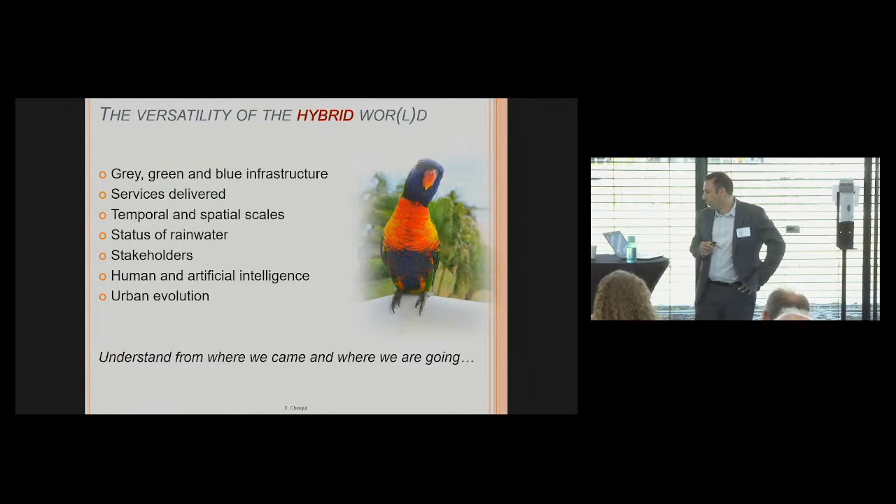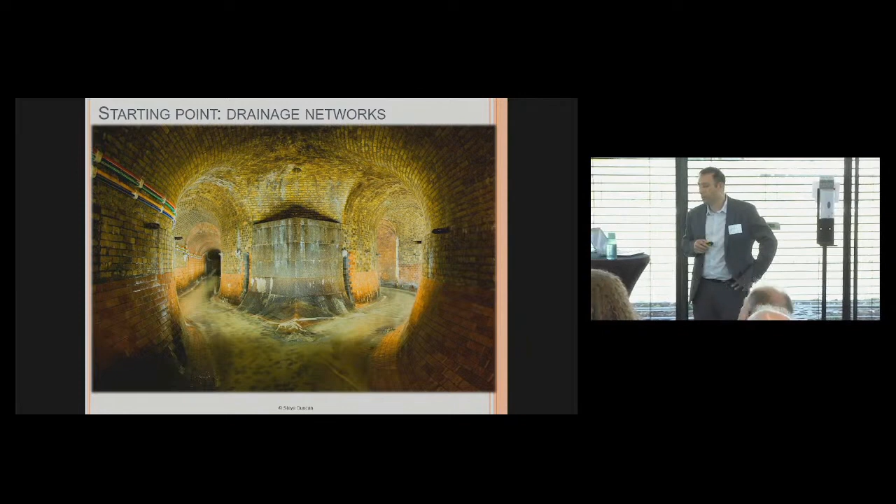So we need a starting point. This will be the starting point, because I like this picture very much. This picture shows a drainage network in London. Really nice picture. So let's start with the drainage network, and let's start at the end of the 19th century, so 100 years ago.

Mainly because of sanitation and centralism, the fact that we all want to bring everything to one place, and we are very proud of that in France. If you go by highway, train, whatever, it's always going to Paris. If you want to go from, let's say, Lyon to Bordeaux, you have to go through Paris. That's centralism. And there was also scientism, saying that science can solve everything. We can build everything and solve everything.

And at this time, we were also very rich. If we had to build the drainage network today, it would be impossible. We don't have the money to do that. So we came up with the network, for drinking water, for the drainage network, and for sewer.

I would like to show you a picture. This picture comes from a book written in 1900, in which a writer wrote about the world in 2000, 100 years later. In 1900, Albert Robida, a not very well-known French writer, wrote this book. And in this book, there is this drawing of what the city could be in 2000.

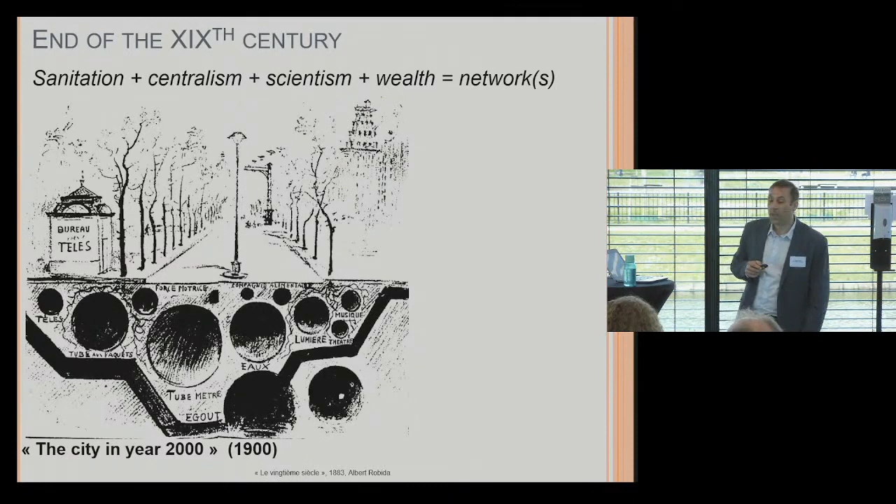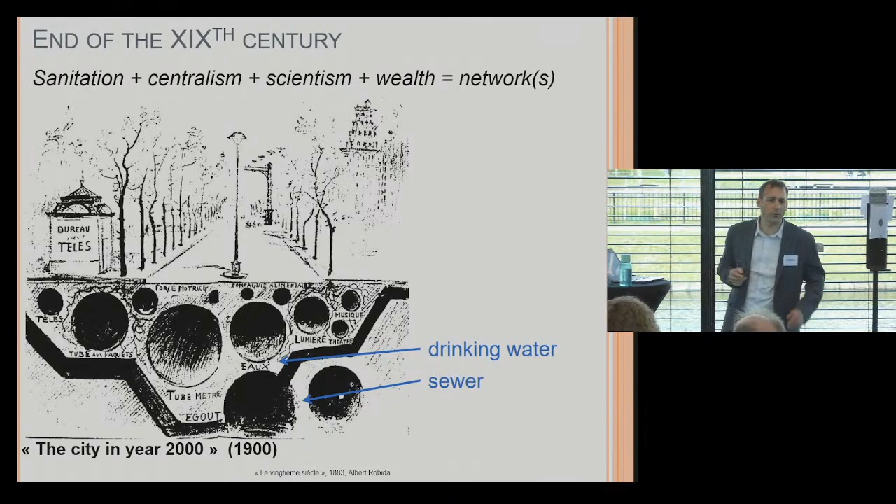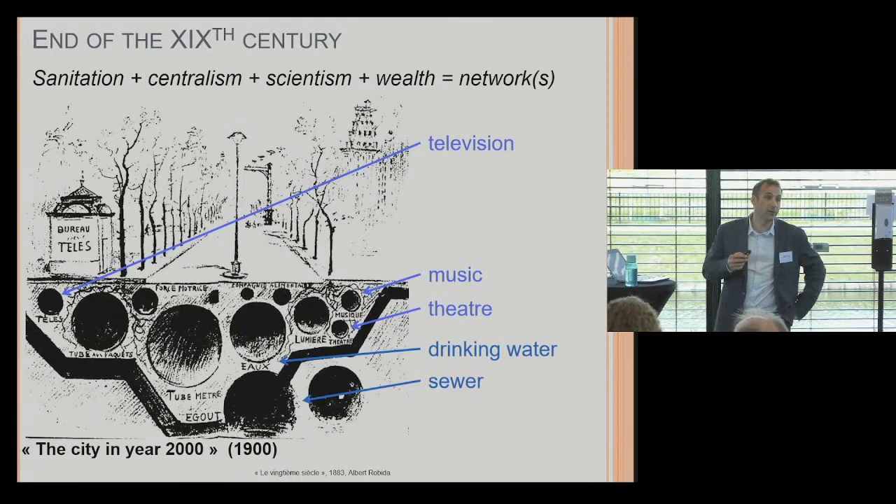In the city of 2000, you can see the drinking water pipes and the sewer pipes. Drinking water pipes are quite big, anyway. Then you have the television, but not what we know now as television; it was more like video conferencing. You also have the music and the theater, which is the internet for us. You have the mechanical energy and the light. And the last one, which you cannot see here because it's smaller and written in French, is the food.

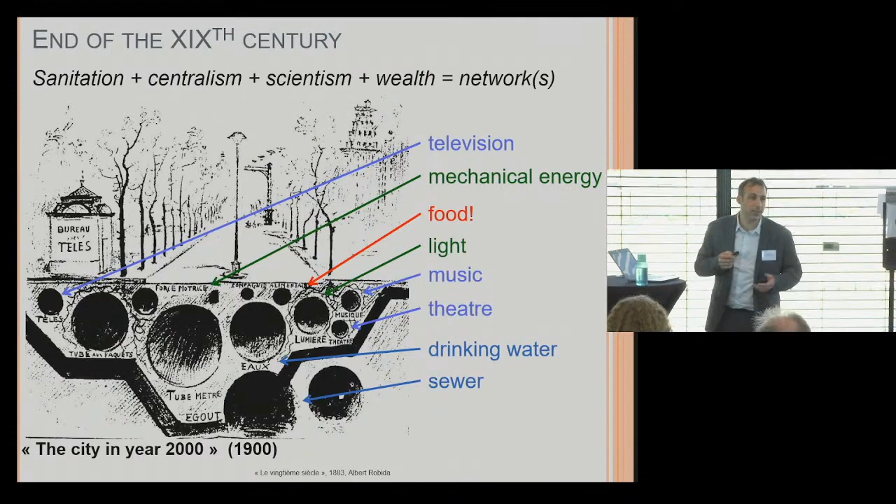So basically, imagine that in the year 2000, we would have a food network. It means that the food company would deliver food directly to your home. The soup could be easy. Then the fish, the beefsteak, everything would come to your home, even the alcohol or the water or whatever. And of course, we joke about that.

Not only because we are French and food is very important. We joke about that because it doesn't seem possible. But that was the idea of the network, the idea that networks can solve everything. That was really the idea in the last century.

And so we built what we call the impervious city. The idea is to collect the water and put it outside of the city. So we built impervious cities with huge drainage networks. You could even drive a car in some drainage networks in France and other countries. And you have the funnel effect, concentrating all the water outside of the city or at a specific point, which we now know is not good.

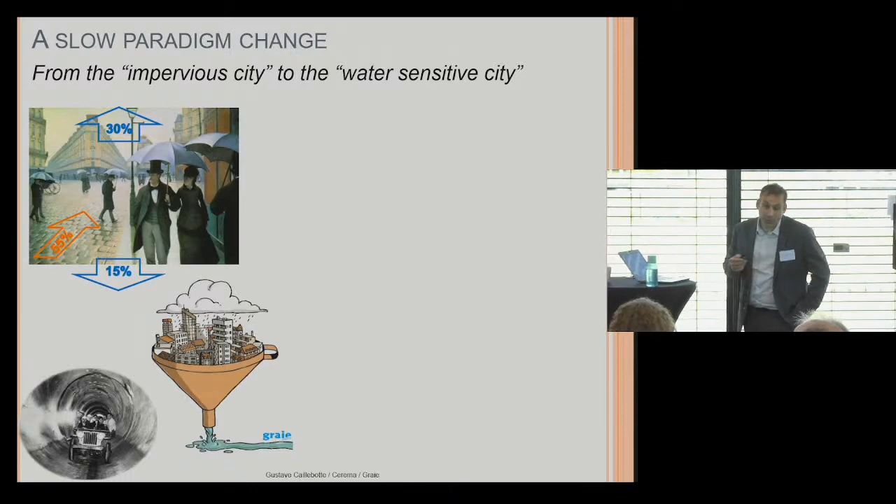So now we are trying to move to what we call the water-sensitive city or the sponge city; there are lots of different concepts. The idea is to have a pervious city. And in the water-sensitive city, the idea is to make the city transparent to the water cycle.

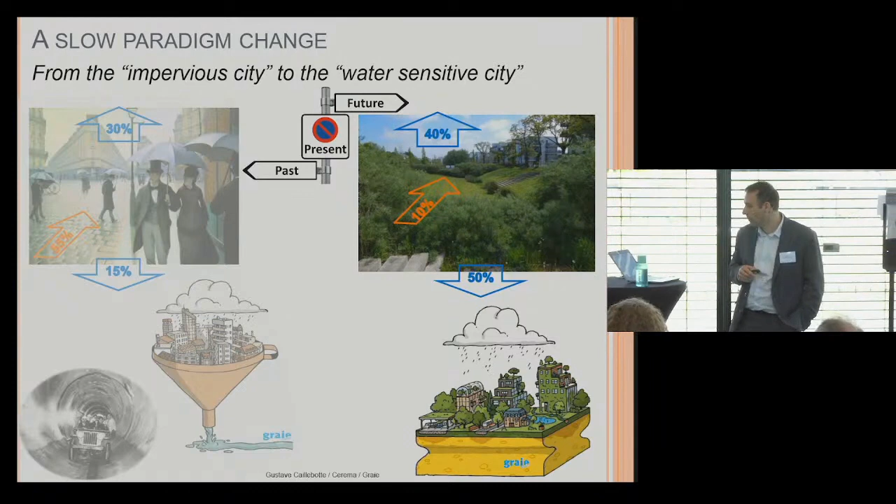So basically, all the water cycle should be the same before and after the city, which is quite difficult, but that's the main idea. So we are moving to this water sensitive city. To do that, you all know we are pushing for what we call nature-based solutions, stormwater control measures, and they have many names. And usually the idea is to have some detention and filtration, and to manage water as close as possible to where it rains.

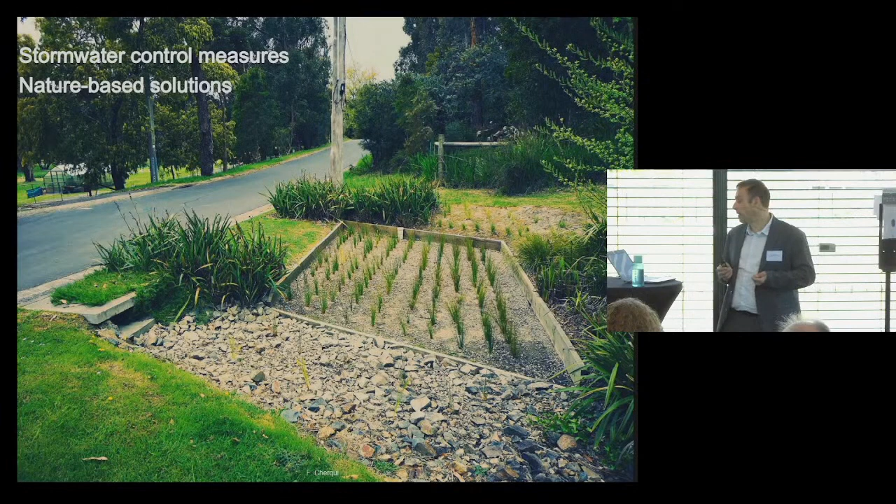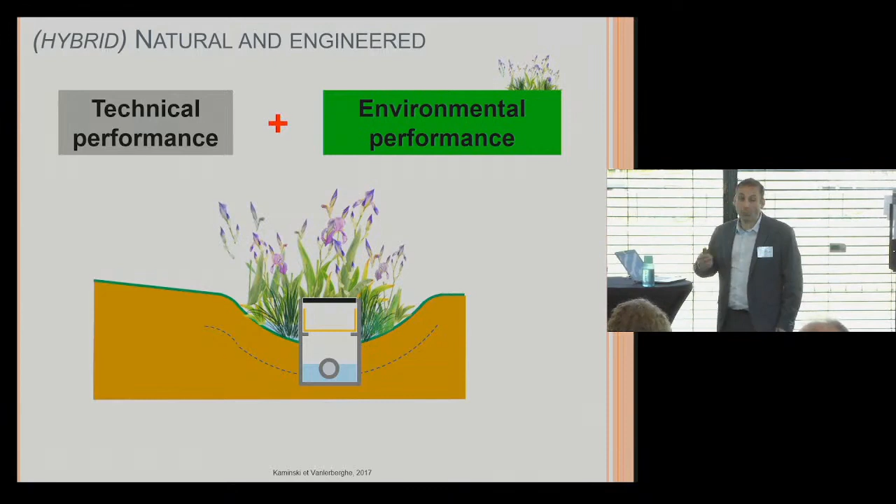And so that's where we are now. We are at the beginning of this nature-based solution to manage stormwater. And this is also the beginning of the hybrid world. The first hybridity is about the fact that this nature-based solution is made both of natural and engineered parts. And you expect performances or services both from the technical part and from the natural part. And you also expect services from the combination of both parts. So you are in this hybrid expectation from the system.

And then you have the more natural part, where you can also manage, but it's more difficult to manage, and you cannot do what you want, and you cannot expect the result as soon as you finish managing. You may wait for the nature to grow. It's not as easy.

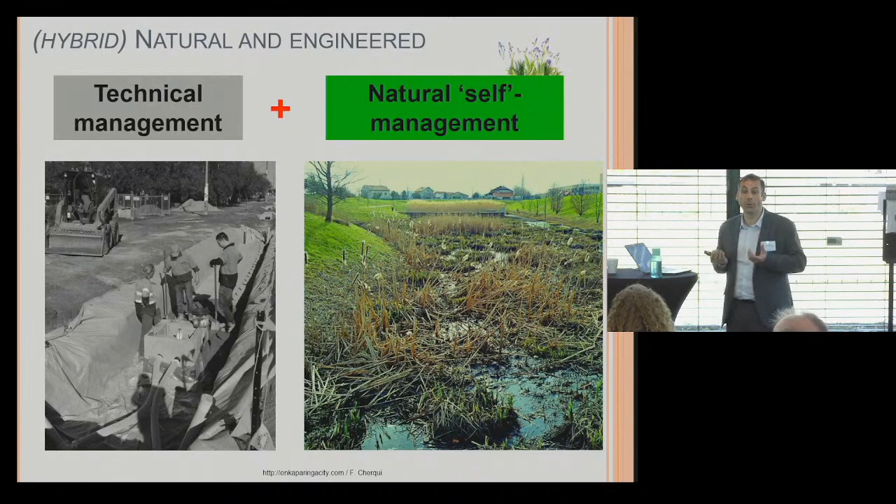So hybrid is at the level of the system, based both on the expectation and the combination of the components inside the system. But hybrid is also at the scale of the city. We will never get rid of the pipe network, because it will be too expensive to get rid of them, and they are also working well in different situations. So the city we are building is hybrid. It's both with pipes and with nature-based solutions. But the whole system needs to deliver services.

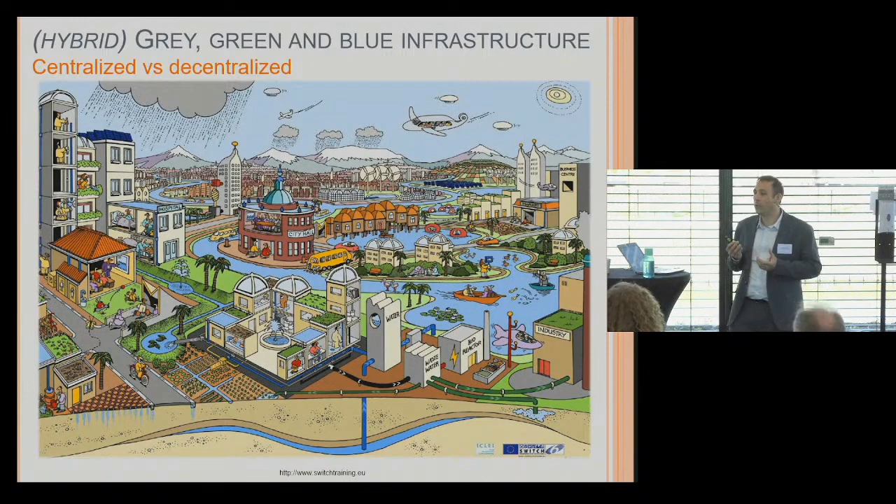When you're looking, for example, at flooding, you need to be sure that you have the same flooding protection for the whole city, combining pipes and nature-based solutions. But they are managed separately. So that's not working well for now. So it's also hybrid at a larger scale.

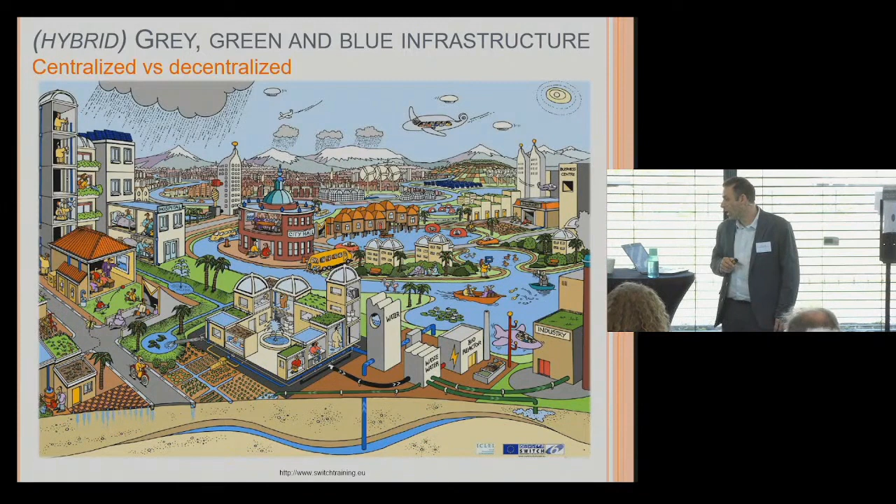And it's also hybrid from the expectation you have from the system. At the city scale, when you had only pipes, the idea was to collect and to convey outside of the city. And that was what we needed from the pipes, and it was working. And now it's much more complicated. So you expect much more services from this hybrid system. Of course, you have traditional expectations about flooding, human health, and so on.

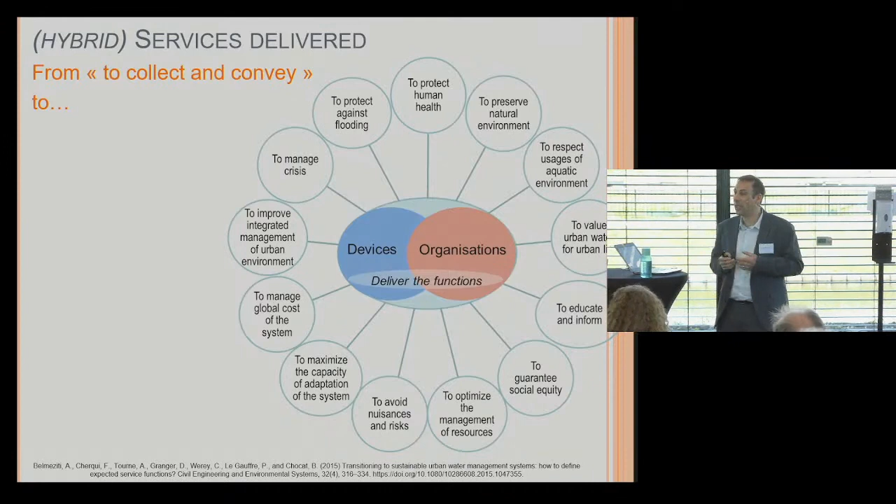But you also have new expectations because some of the nature-based solutions will be on the surface and will be in contact with the population. So you need to be sure that it's used and it's working with the inhabitants. And you are also using part of the surface of the city. Could be a road, could be a sidewalk. So you expect also that this nature-based solution will also be a sidewalk or a park or a soccer field or different things. So the expectations are much more important.

And these expectations are also on very different temporal and spatial scales. If we consider that we build nature-based solutions to mitigate climate change, that's a huge scale because we do that at the scale of the planet. And that's also on the long term. Not so long now, but supposed to be on the long term. If you consider flooding, it will be very local and it will be now. So you have to deal with very different scales for these expectations.

And so if you design the system, if you assess the performance of the system, you have many different services and you can choose what the frontiers of the system are. That's quite difficult.

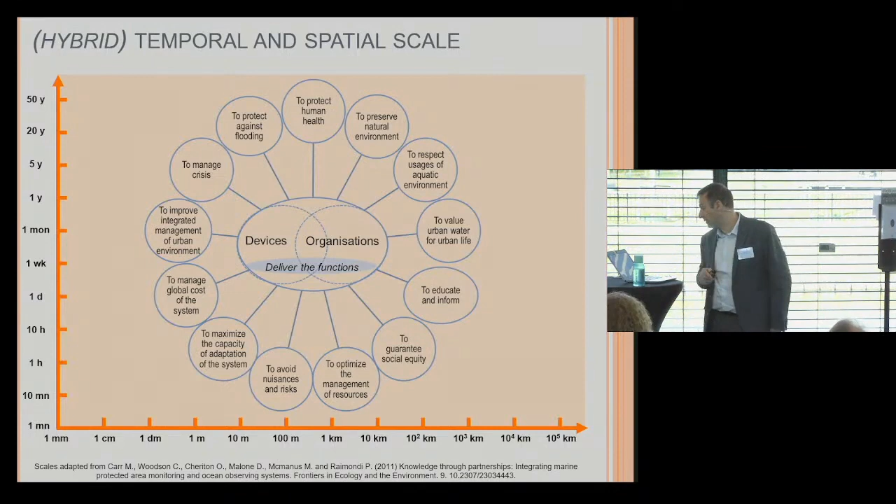If we go back to the rain itself, the rain is also hybrid. The status of rainwater is really hybrid. For a very long time, we have considered rainwater as a threat because it's flooding. It could be dangerous, it could be damaging. The video comes from Lyon in 2011. And so you can consider rainwater as a flooding problem that you have to manage.

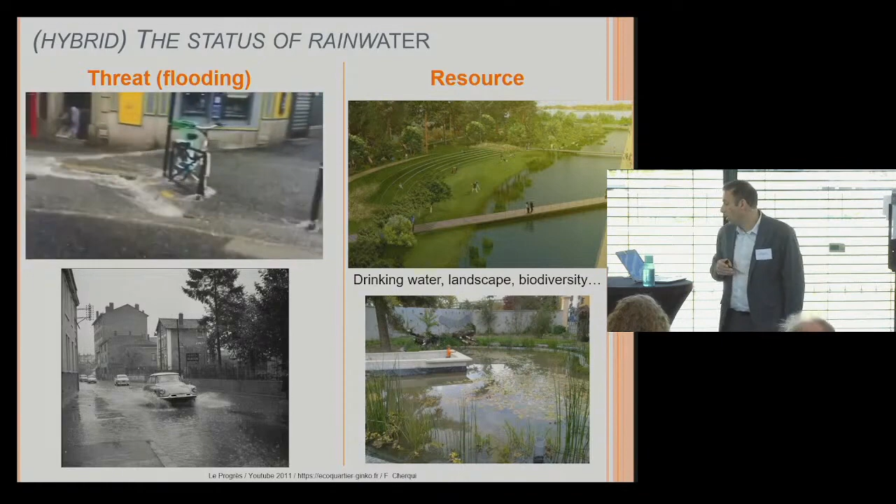But the rain is also a huge resource for cities for drinking water. Some cities do not have drinking water, so you can use the rain. You can build very nice landscapes with the rainwater, and you can help to preserve and develop biodiversity. And so it's also hybrid on this.

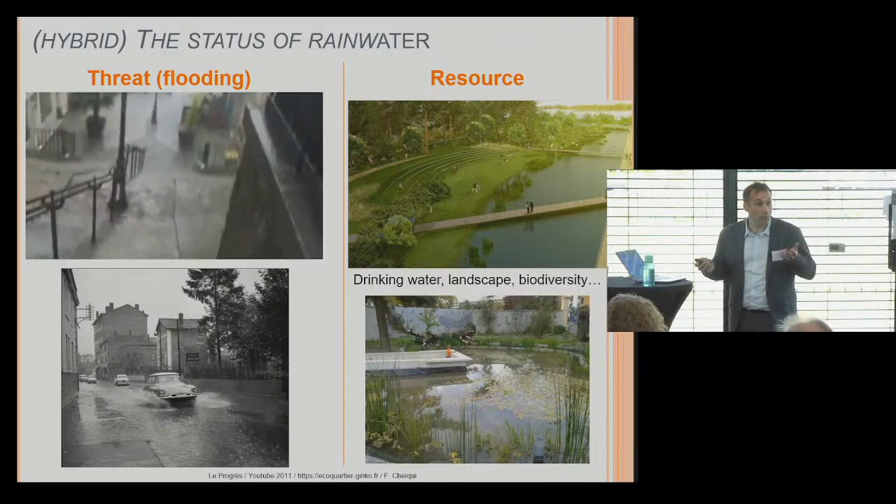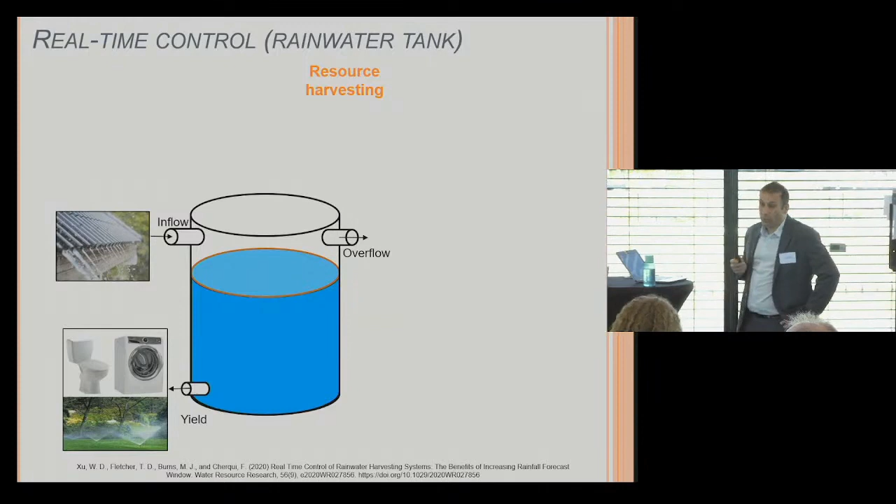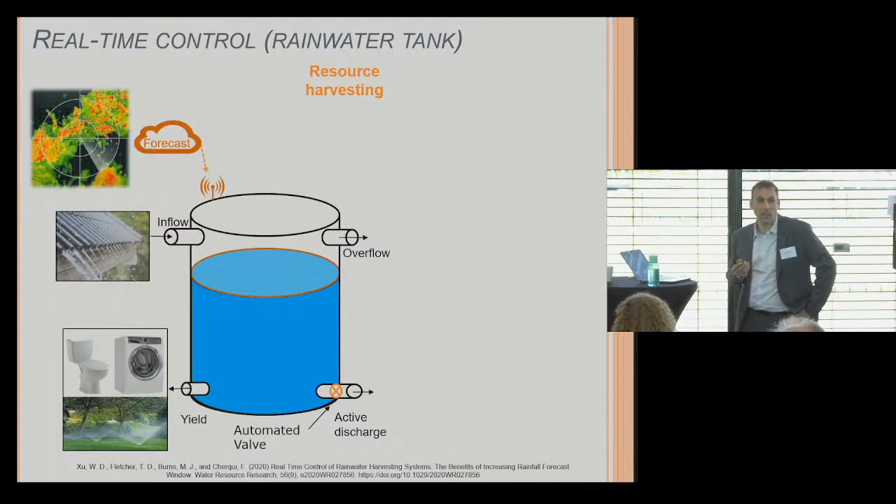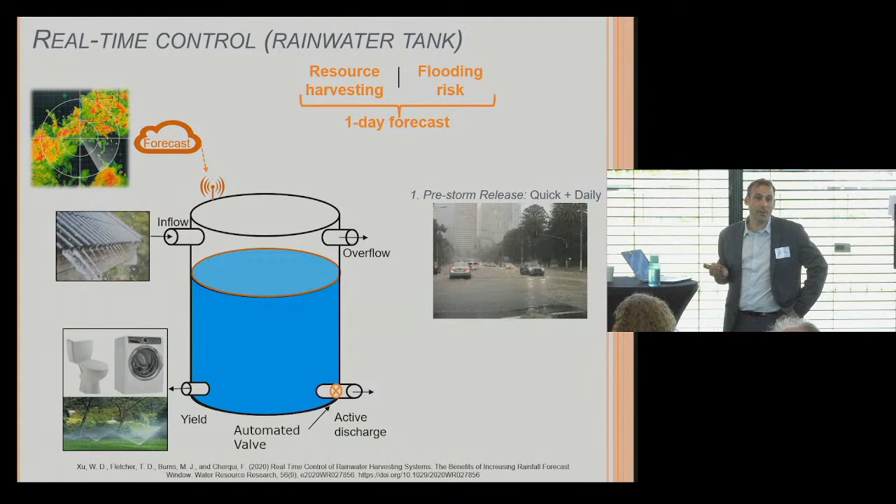But you can do more. First, you can install a valve and control the discharge, not wait for the overflow. If you do that, you can also connect with the forecast, and you can use the forecast to empty the tank one day before the big rain. So if you empty the tank one day before the huge rain, you do pre-storm release and you reduce the flooding risk. You are managing flooding also. You are managing both the water as a resource and the water as a threat. So that's quite good. We can do that.

And we have shown that we can go further. You have now 7-day forecasts. That's something that is developing more and more. The 7-day forecasts are not so accurate, but they are becoming more accurate. So if you have a 7-day forecast, what you can do is start to release 7 days ahead of the big storm. So what's the difference? The main difference is that you release much slower. So the flow will be reduced, and you won't send a big flow to the stream. So you will also work for stream preservation.

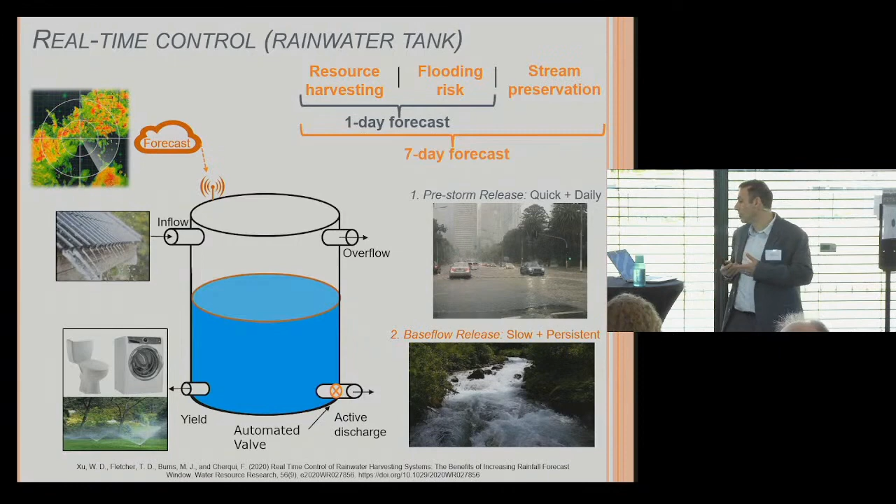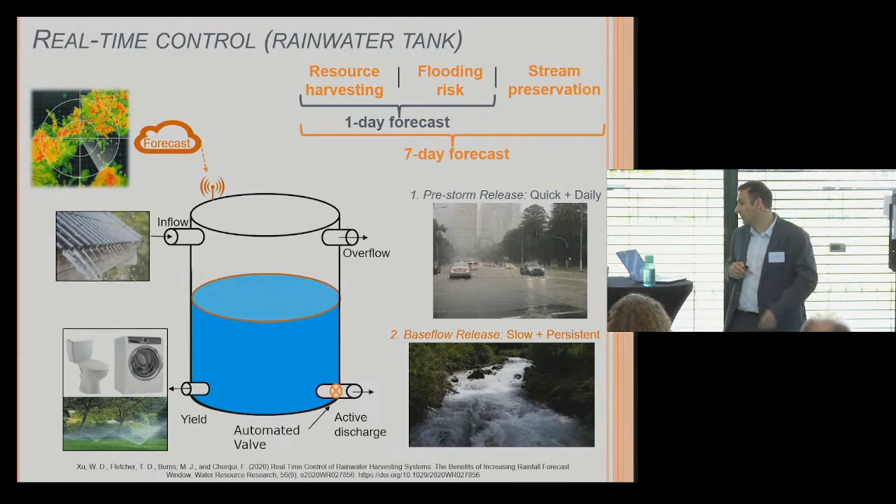And why is it hybrid? It's hybrid because now we are combining the traditional system. The rainwater tank is very old. And the swale, a trench, they are all very old systems. But what we are doing now is that we connect communication and control, and we are doing real-time control and real-time monitoring. And so combining this past and the future, this hybrid will help us to make the most of these systems and make them adaptable to today's life. So that's another way of seeing how the world is becoming hybrid.

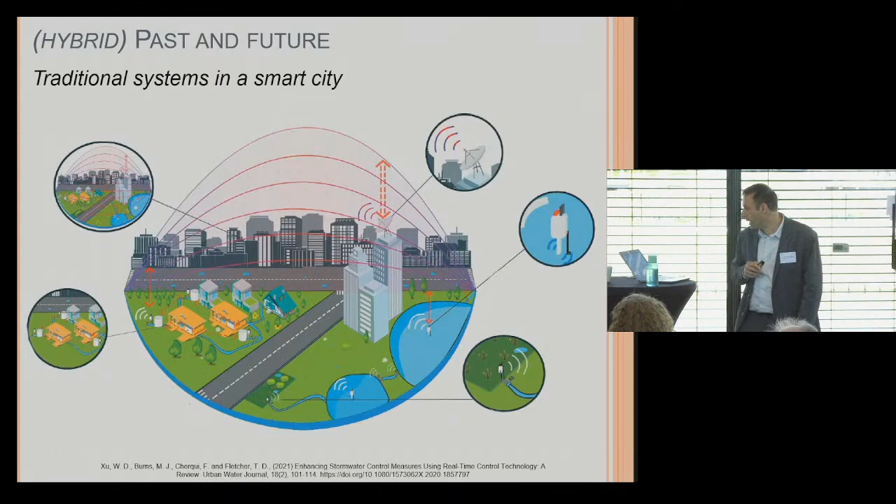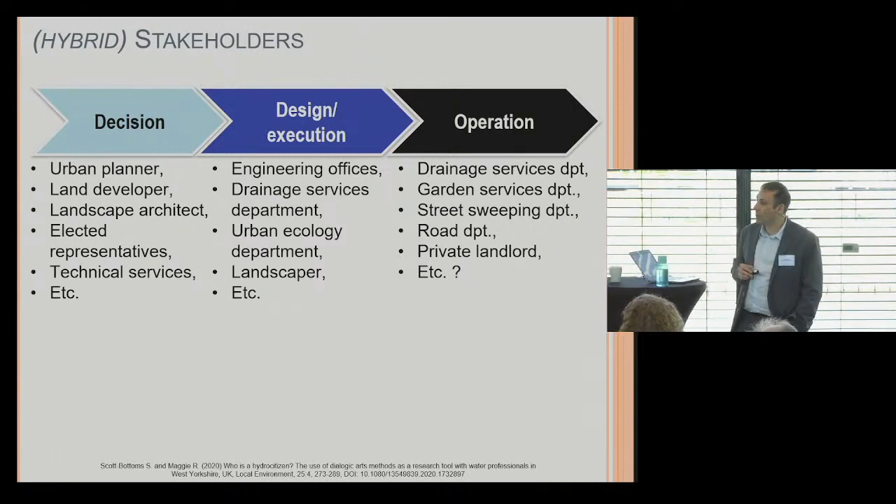And then you have the stakeholders. When you are designing a nature-based solution or urban drainage system, you need to involve many different stakeholders. You have the urban planner, the land developer, the architect, landscape architect, and so on. And then when you do the design and the operation, you involve many stakeholders. So it's hybrid in the sense that you really need to have different stakeholders to work with. And there is a very important stakeholder that is not here, an important stakeholder that was not really necessary before with pipes. This is the inhabitant, the citizen.

And we are discussing more and more about what we call the hydro-citizen. The hydro-citizen, there is no official definition, but basically it's a citizen, an inhabitant that is aware of the water as a resource and as a social link, and who wants to be active for water management. That's maybe the inhabitant living close to a wetland that will help you to manage it, and just be aware of what it's for, and start to be part of the solution.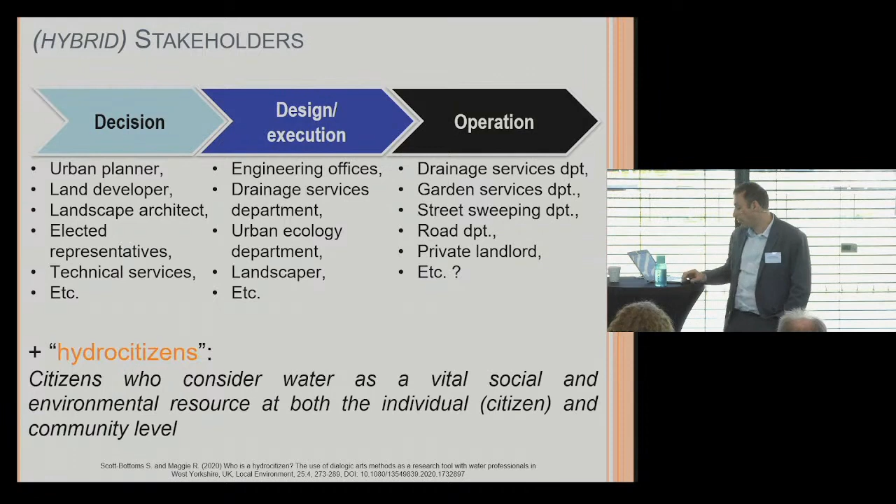So lots of stakeholders. And we were discussing this morning with Franz about the fact that you have also the public and private land, and that's very different. That's also another way of seeing hybrid systems. I have a quick example about that. So this is in Lyon. This is a small swale along the road in Lyon, and so the swale has to be managed. So we were discussing with the manager of the swale how this swale is managed, and that's quite interesting.

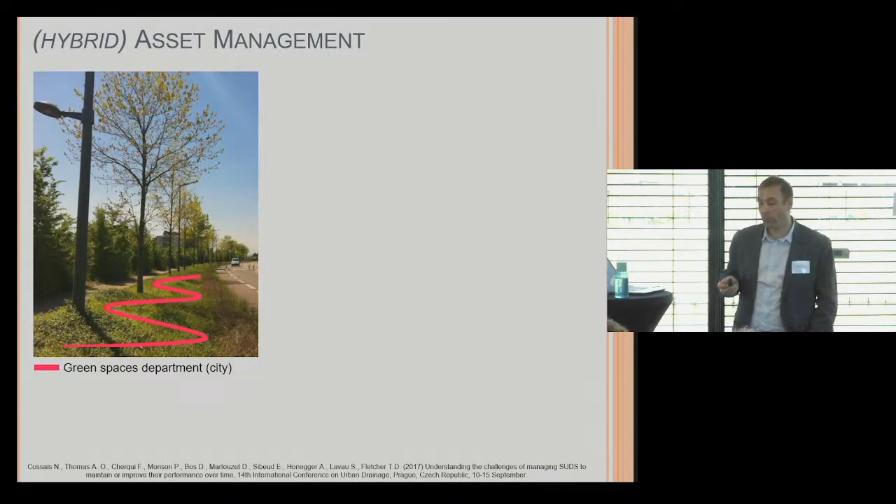The grass is managed by the green space department. They have to mow the grass, and so because it's a green space, the green space department will be in charge of that, and that's part of the city. And then you have the tree. The tree is managed by the road department. In the road department, they have a specific department dedicated to trees along the street. So they are in charge of that. So they are managing the tree.

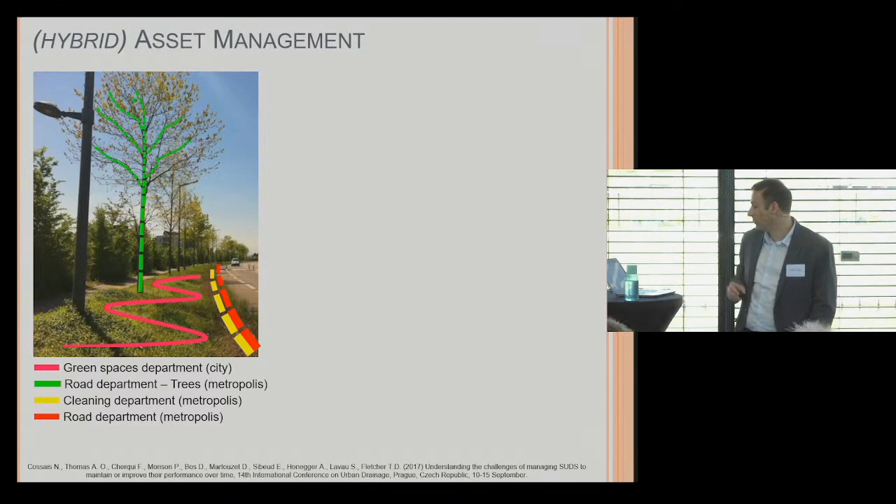But you have also the cleaning department, because there will be cleaning to do. So they will be managing not only the street, but they will clean the swale. And you have also the road department, because the swale is close to the road. So when you do works or intervene in the road, you have to be careful with the swale. And maybe you'll also have the drainage department, because the swale was supposed to work for urban drainage, so they are part of the team. And so that's really an illustration of the fact that it's hybrid for the stakeholders.

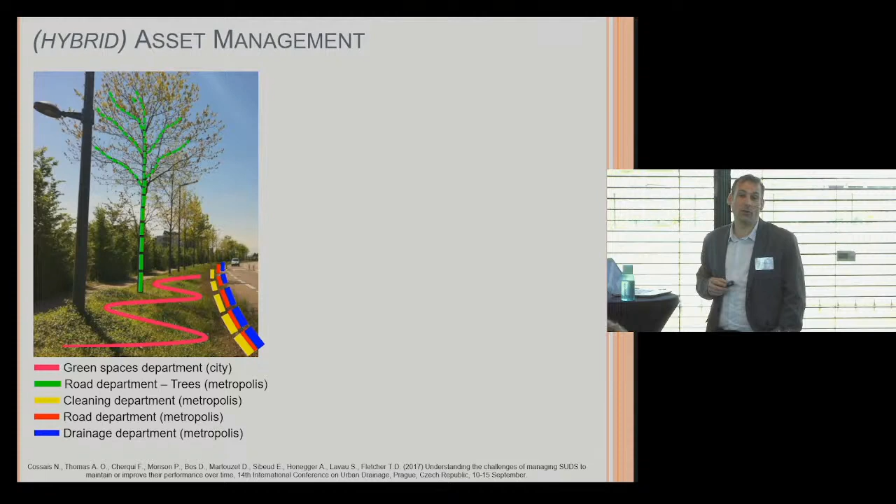And that's very complicated to deal with, because there is no perfect solution. So it's a lot about task attribution and knowledge sharing. If I go there and clean the swale and I see that something is going bad, I have to know who I need to tell about that. It's also about common language, because we are all in our field and we need to work together. And at the end, it's a lot about cost sharing. And I've seen projects, very nice projects, that have been abandoned because nobody wanted to maintain the project, because it was a new cost and nobody wanted to be part of that.

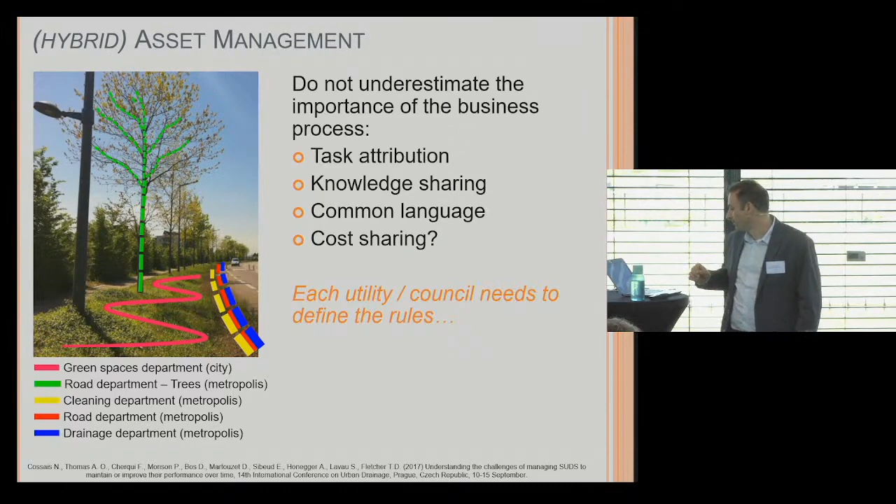So hybrid. And then you have the human versus or with artificial intelligence. In asset management, we often use this definition that infrastructure asset management is the art of balancing performance, cost, and risk in the long term. So you have all the keywords: the performance of the system, the cost, renewal cost, operation and maintenance cost, and impact cost, and then you have the risk, flooding risk or whatever. So asset management is all about finding the best solution for your asset, for your system in the long term, given all of that.

And if you start to ask utility managers how they are doing that, there was a very good PhD a few years ago by Wouter van Riel here at TU Delft. And when you ask them, you learn that a big part of the decision is subjective. It's based on your experience as utility manager. You've seen things and you have your experience. A part is also based on gut feeling, what you think is right. But of course, you also use models and data. So you have to combine this subjective decision with computer-aided decision. And it's really hybrid in the way you have to manage it. So in some way, you may need artificial intelligence to learn not only the science of asset management, but this art of balancing between performance, cost, and risk.

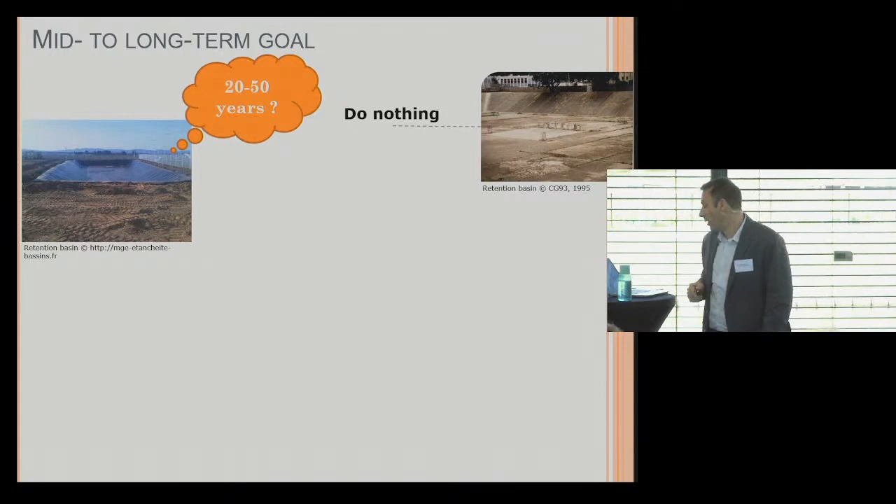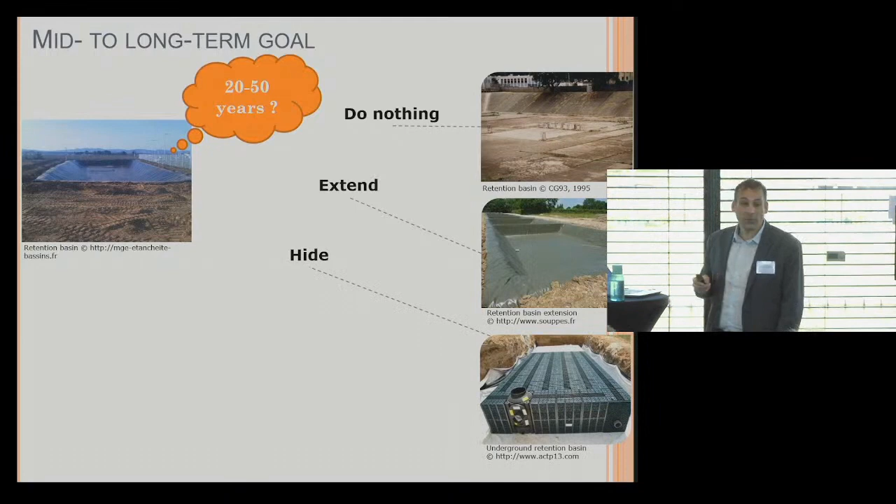You can decide that in 50 years you have to double the volume because you know that climate change is arriving and there will be more rain and you need more volume to manage the rainwater. That's another idea. You keep the same system, you just extend it. You can decide that you need the space, so we will change it. And in 50 years, we need to have something underground. So we have the space on the surface, and so we change the system and we hide it. Could be another solution.

Some new solution is, the idea is to integrate. You have this retention basin, and you change it to a wetland. And then you have the nature, the vegetation, you still have the retention, and that's totally different. It's integrated. Or you have the retention basin, and you build a playground in the retention basin. And you manage it so that it's only flooded every 5 years, something like that, and it's integrated. You're not losing the space. It's not raining so often, so it's a shame to have something dedicated to rain. So you can use it for something else.

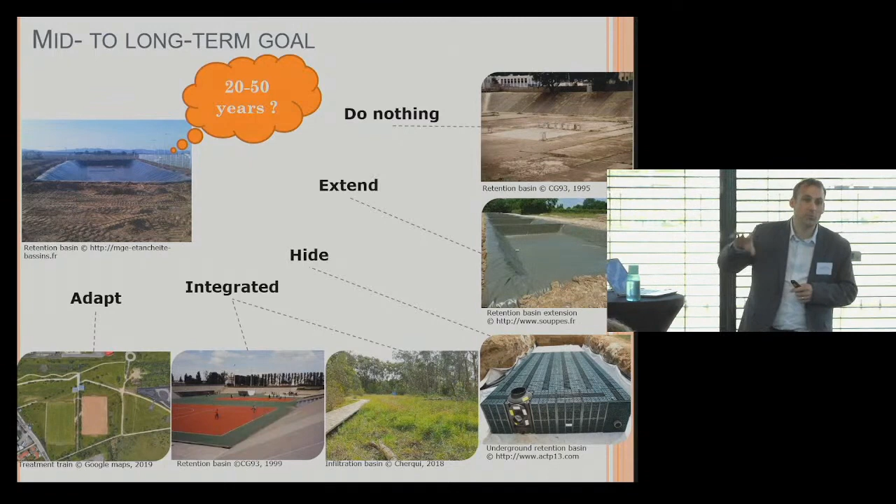Or you can adapt it and change it. And instead of having a big system, you start to make train techniques or cascade techniques. You may have a small retention basin and then a swale or an infiltration basin, and you connect that. And the idea will be that the space used by the system will depend on the rain. So small rain, only part of the system is used. Big rain, all the system is used. And the system is used for something else. It could be a park, it could be again a soccer field or whatever. So you change this big system into a train system, a series of different systems.

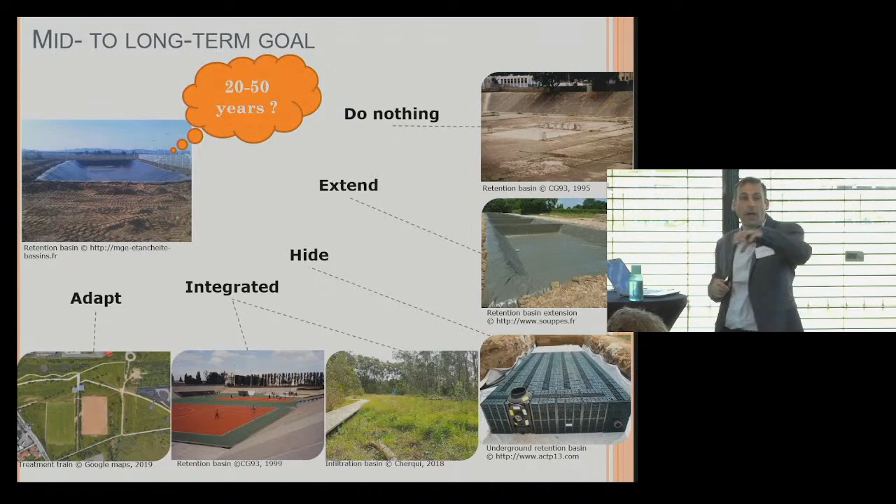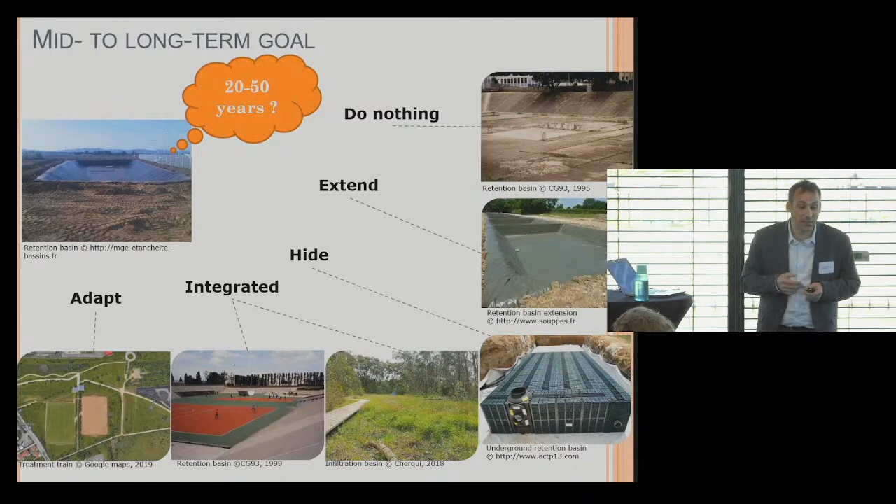And if climate change is arriving, maybe you can add one at the end or at the beginning, or you can change only part of it. And adaptability is something which is more and more important for us. And adaptability is not working well with pipes. You cannot increase the diameter of a pipe.

So the systems we choose are very important from the start. And then hybrid also in the way we consider the urban evolution. For a very long time, we have considered that we were doing modeling and simulation on the long term for drainage pipes. We were doing modeling and evolution for transportation. But now we are combining all of that.

So we are starting to be able to have urban modeling, and in this urban modeling, you can try to predict the evolution of the population in 10, 20, 30 years. You can combine that with the evolution of the transportation system. Will there be more cars, fewer cars? What will be the system? You can combine that with economy. What kind of people will settle? What kind of economy will you have? Jobs, land use, buildings, energy, and waste management. You can combine all of that in the urban modeling.

And we all know that we are definitely not sure of having the correct outcome. So what we are trying to predict in 30 years may be totally different. But the point is not really about the accuracy of the prediction. The point is much more that to build this kind of model, you need all the departments to work together, and you need all the departments to share their vision of the future.

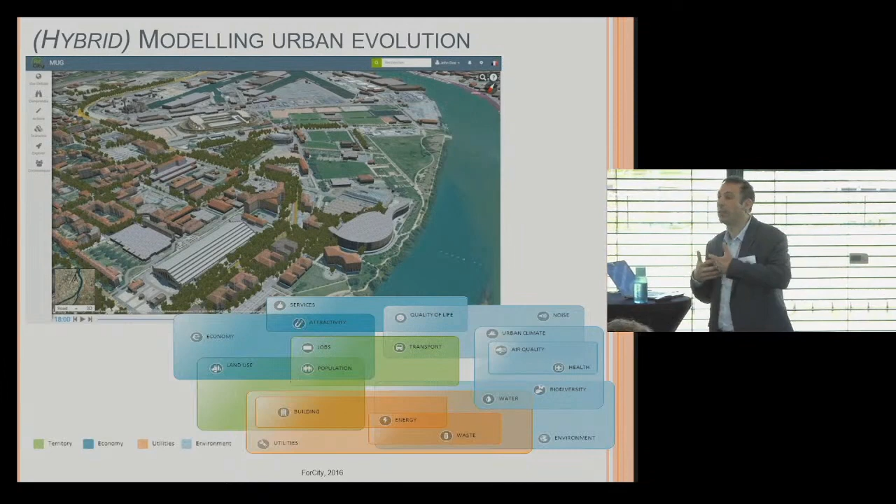So if I'm planning the drainage network with pipes and nature-based solutions, I need to know how the population will be, how the transport will be, how the streets will be, and so on. So I need to discuss with all of these people. And even if the model is not good at the end, at least I have made the connection and I can better imagine the future. So that's all about our hybrid world.

And if I summarize in this slide, it's hybrid because of the rainwater status, because of the urban complexity, the stakeholders, the gray, green, blue, the spatial and temporal scale, the service delivered, the human versus artificial. There are lots of ways of speaking of hybrid systems. It's not only blue, green, gray. And these are two nice visions of the future by two different architects. And for me, the most important thing behind that is that we need to start to think out of the box. Because, Franz will discuss much more about that, but it's not only about engineering solutions.

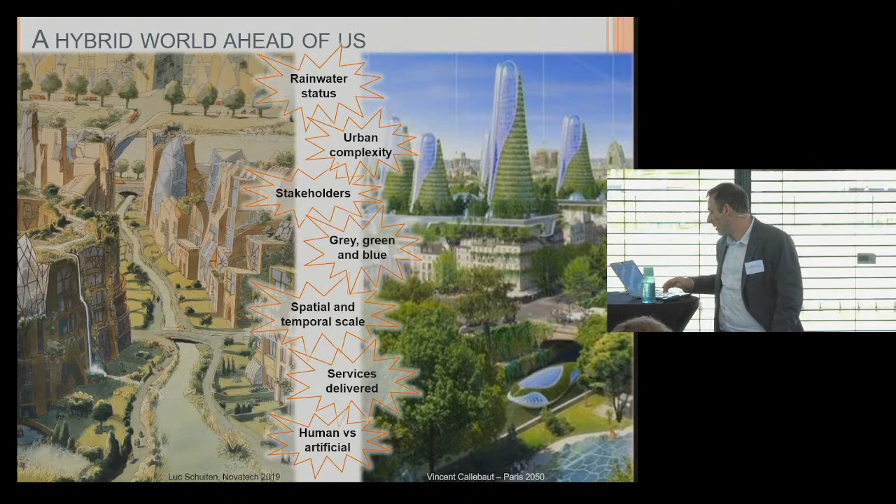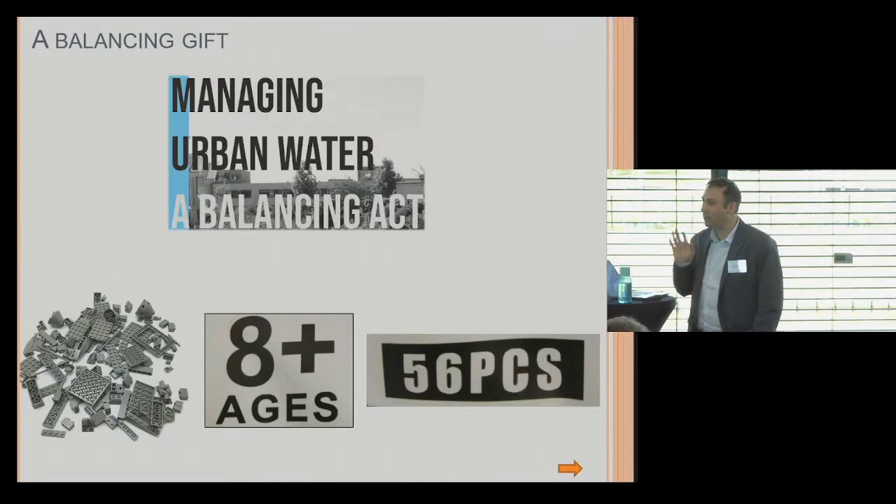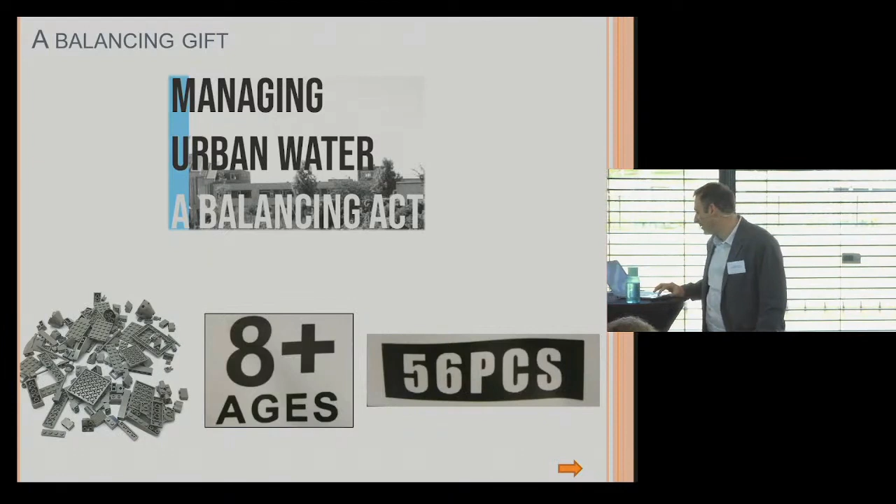Okay, that's almost finished. I gave Franz a balancing gift this morning because the title was Balancing Act. So I gave some Lego to Franz. And I was not sure, so I gave 8+ Lego, and only 56 pieces, you never know. And Franz had to build it for now. He didn't have time to build it. So I will show you what I gave to him. It's something like that. Have you seen this? Maybe you know it. They often call it tensegrity.

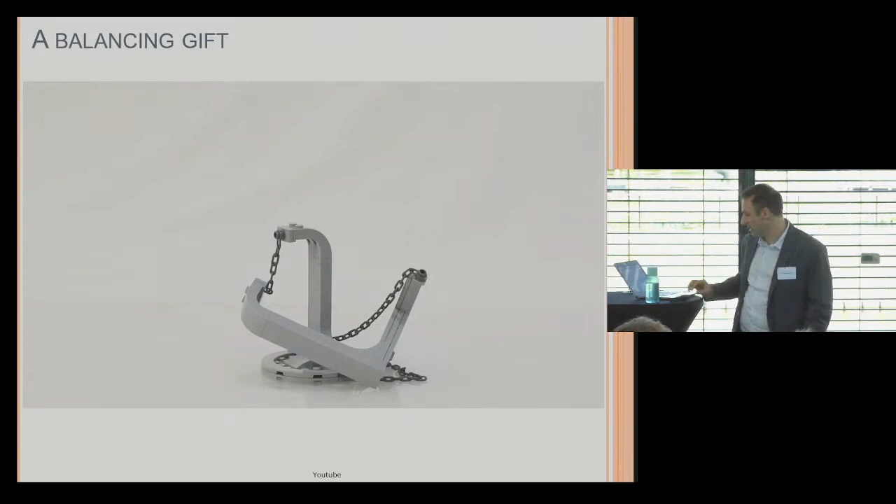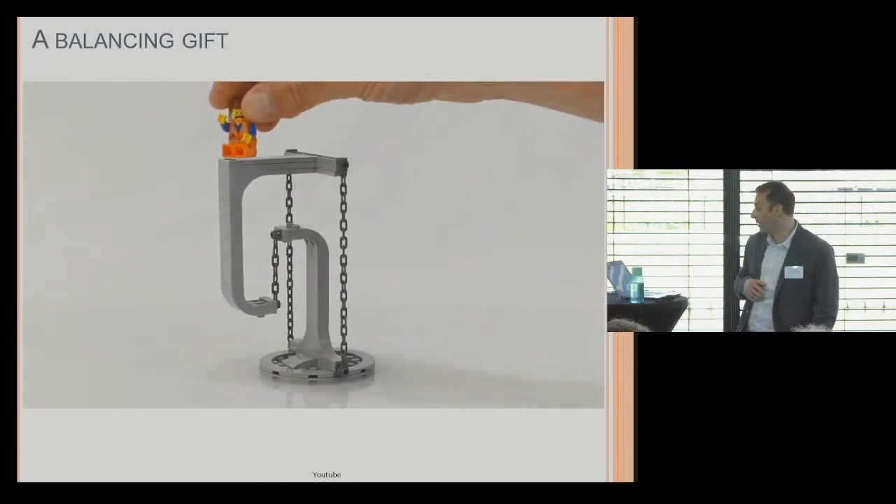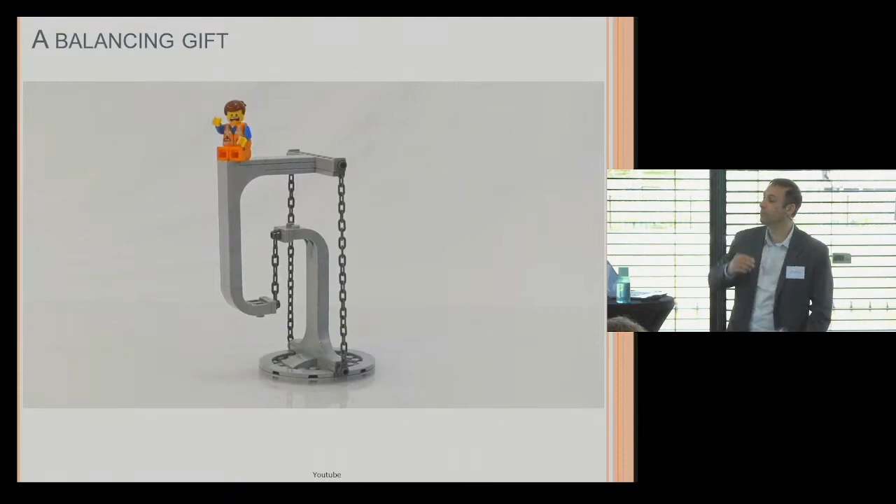So it's very strange. And when Franz finishes building it, you will see. It's a kind of very strange structure that works well, but it's totally unintuitive. If you look at it, it's unintuitive. And again, it's thinking out of the box. Because if I show you this, you will say it's not working, so you have to see it. So I don't know when, but when you go and see Franz next time, you will see it. Okay.